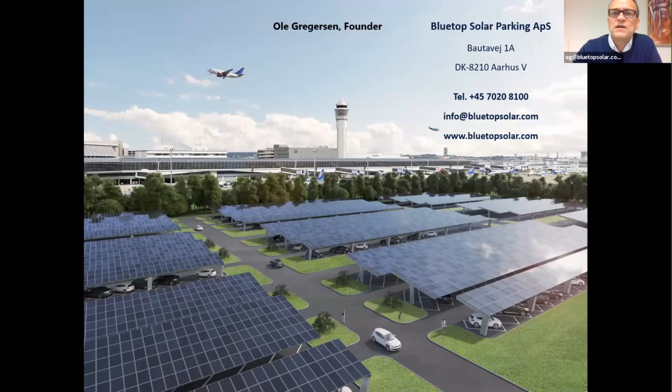We are in a totally different field than the previous ones. We're in an interface between construction, parking, and energy. Our offering is covered parking areas, covered with solar carports, where the roof consists of PV solar modules for producing sustainable electricity. We're based in Aarhus, Denmark, and started this project with the first commercial deliveries in 2015.

Why invest in covered parking areas? First of all, the two large sources of solar electricity come from ground mount installations and rooftop installations. But this is a way where we can also utilize other sources, in this case, parking areas.

Of course, the investments for covering parking areas are larger than if you have solar on rooftops or on fields. But here you utilize existing black areas, so to say, and there are different reasons for doing that. First of all, you get clean, sustainable electricity. Also, local production of electricity is very much needed in the future, because our consumption of electricity will increase, and it's also a matter of having safe solutions.

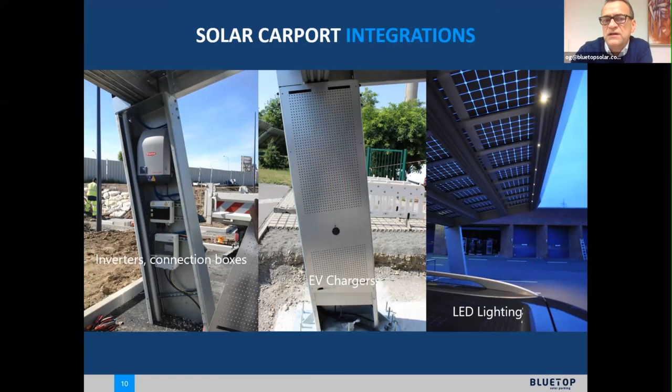Where we are special compared to other suppliers is that we have a very deep assortment. We are specialized in having solutions pre-engineered for any parking area, and we also do integrations of additional equipment like LED or hardware integrated in the structures.

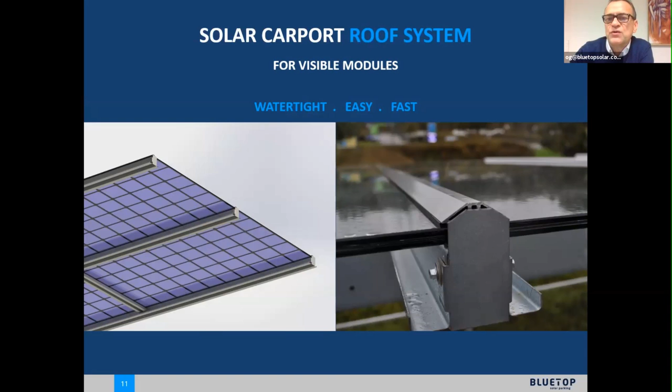We have different ways of making the roof. This is our own development where we have a special railing system, so you don't need subroofs, and it's still a watertight solution. Foundation is also something we are nerding about, to avoid huge consumption of concrete. We also provide solutions with steel in the foundations, which has a smaller impact CO2-wise. So I'll show some examples of projects we have made.

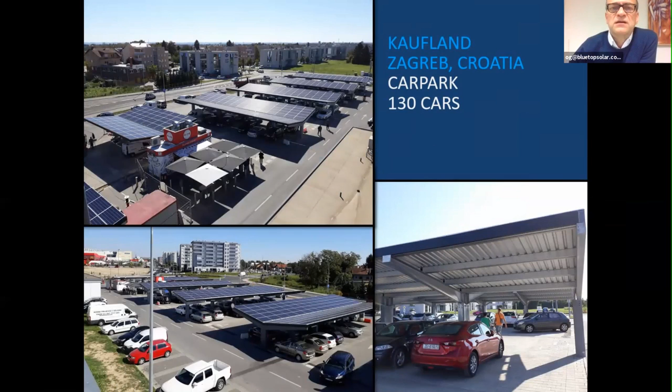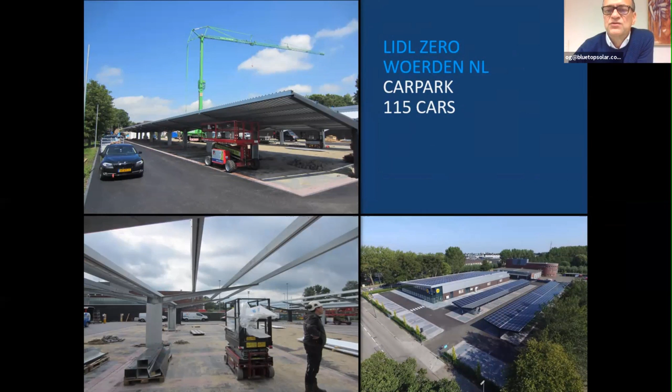Here it's a supermarket in Croatia, and here's another supermarket in Netherlands. This example is actually a project where we're supplying to the first zero energy supermarket in the world, so they produce all the energy themselves locally.

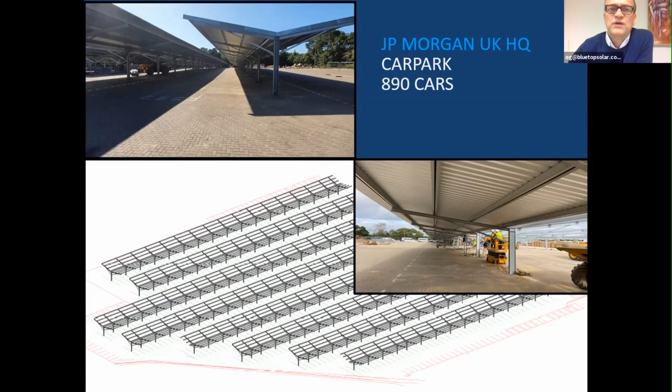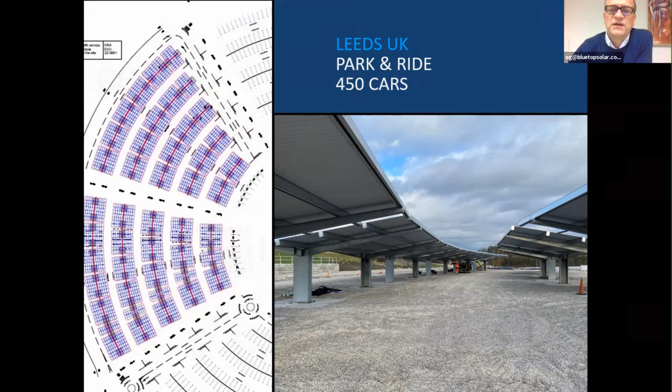So of course the link to electrical mobility is an important part of the concept, because you need shelter and you need more local production of electricity.

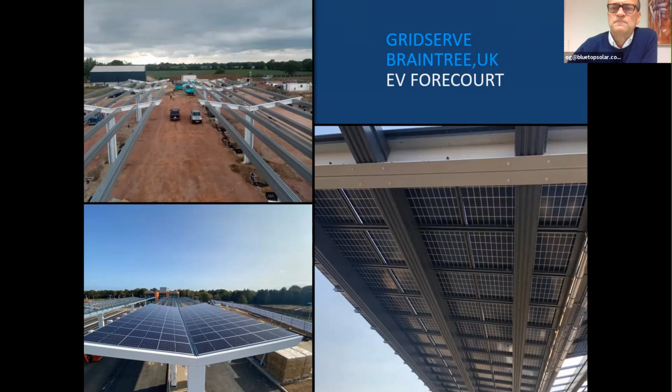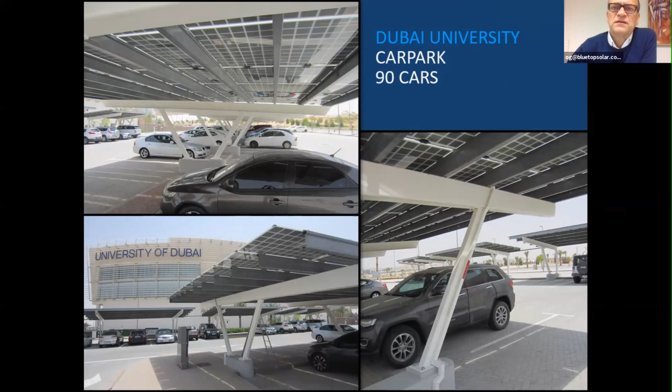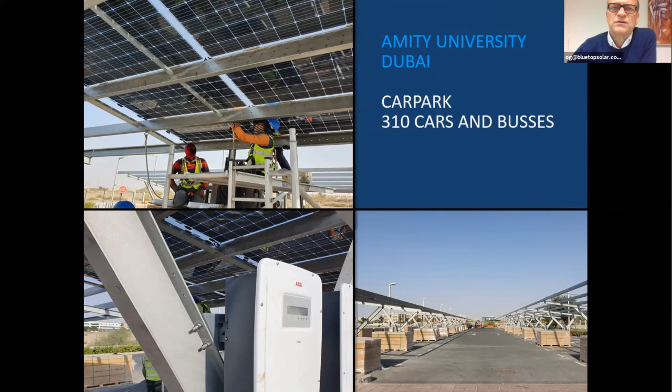I'll show you three examples closer to India, at least: from Emirates, Dubai University, and another university in Dubai, Amity, which is actually an Indian-owned university. Then on top of a parking house next to the Al Hamra building, the tallest building in Kuwait. So rooftop utilization is also very interesting.

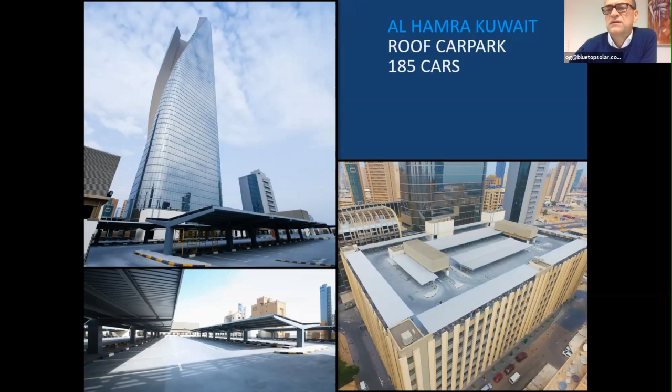This is another example of covering a rooftop of a multi-story car park. Yes, we have supplied to different continents, and we are very keen to move on with countries like India and further going further east.

So our ambition is to scale this up, and at the moment we are making a department in Poland, and we are looking into making departments also in UK, in Emirates, and maybe also in India.

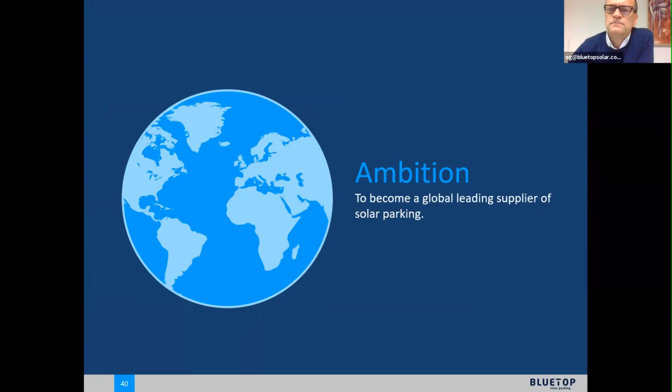This ambition is the reason we are looking into India for different reasons. First of all, we know there's a big demand for sustainable energy in India, and there have been for several years lots of investments in solar projects. The same, but a little later in development, are the regions in the Middle East and North Africa.

I showed you examples from the Emirates, and that's also very interesting for us in the future, including other countries in the region, like Saudi Arabia. So we're looking into the Indian option, which could be a hub for us for India and MENA regions, but also could be a hub for Southeast Asia. So steel components sourcing in India is interesting for us, and also India produces other solar components like solar modules.